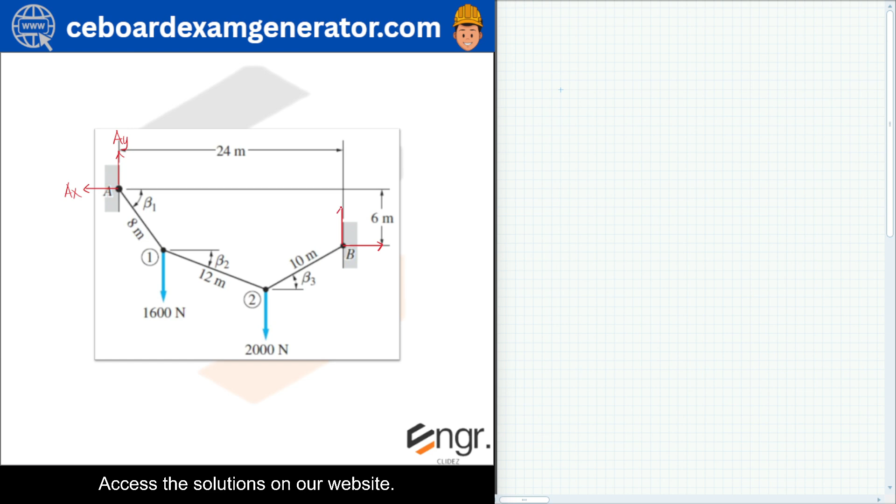Then dito sa point B, meron din tayong reaction acting away din sa joint. So this would be BY and this is BX. Notice na by summing up forces horizontal, considering the whole system, then AX must be equal to BX, since sila lang yung horizontal forces at kailangan silang mag-balance. So if AX is equal to BX, ang horizontal component ng cable na ito pala ay equal din sa horizontal component ng kabilang cable.

At looking at joint 2, nag-intersect yung dalawang cables dyan. So whatever the horizontal component of this cable is, it must also equal the horizontal component of this other cable, since magbabalance sila and the net horizontal force would be equal to 0. Ibig sabihin pala, sa lahat ng cables, the horizontal force is equal. So we define the horizontal force as sabihin natin H.

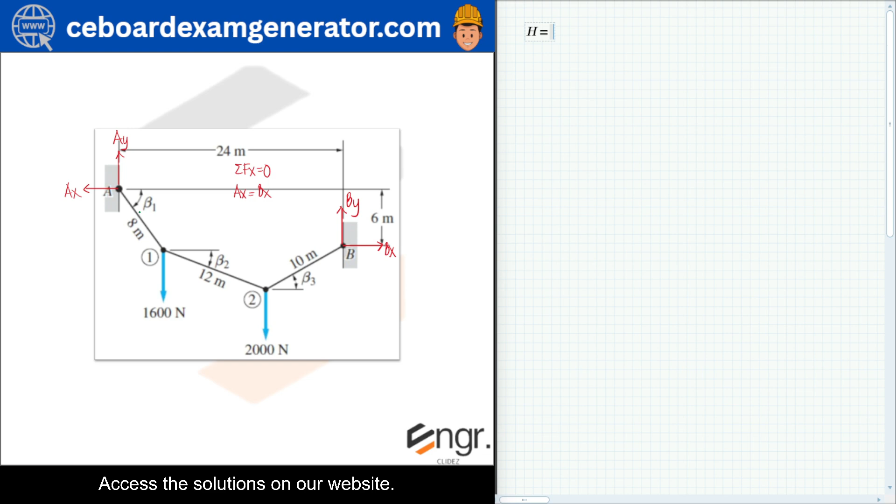So if the horizontal force is equal to H, sabihin na lang natin ito ay T1, ito naman yung T2, at ito ay T3. So H pala is equal to T1 multiplied by, for the horizontal component, cosine beta 1, equal din yan sa T2 cosine beta 2, horizontal component of T2, and also equal yan to T3 multiplied by cosine beta 3.

So therefore pala, if we express T1 in terms of H, we divide na lang natin yung H by cosine beta 1, we would have this expression: T1 is equal to H divided by cosine beta 1. And this would also be true sa T2 and T3, but we divide by cosine beta 2 and cosine beta 3 respectively. So T2 is equal to H over cosine beta 2, galing dyan. And T3 naman is equal to H over cosine beta 3.

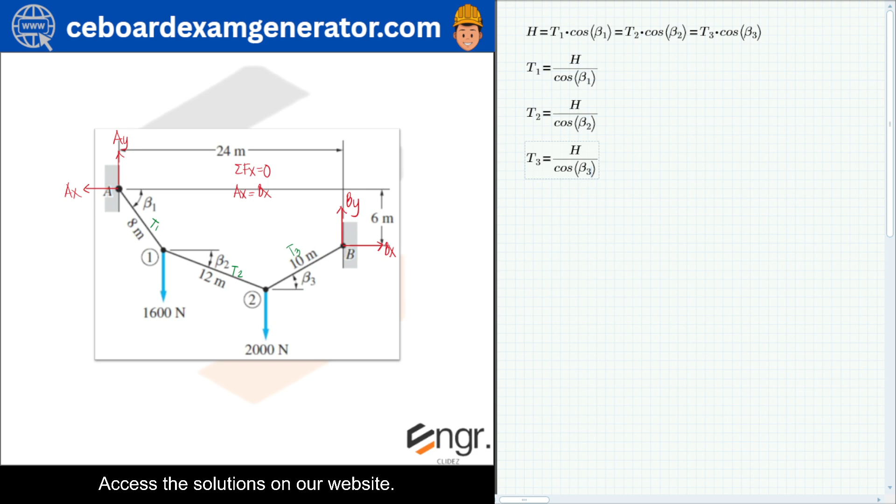Now, looking at this joint, at joint 1, we can sum up forces vertical. The vertical component of this force would be acting upward. Ayan, yung cable force na yan, pag ganyan yung components niya. So this would be T1Y and this is T1X. And for this cable naman, in tension, downward and to the right yan. So this would be T2Y and this is T2X.

So yung T1X saka T2X, ito yan sila: T1 cosine beta 1 and T2 cosine beta 2. Yung T1Y naman would simply be T1 multiplied by sine of beta 1, and this is acting upward. Yung T2Y downward, so we have minus T2 multiplied by sine of beta 2. At 1,600 is acting downward, so minus 1,600. Equate natin to 0. Rearranging, we have T1 sine beta 1 minus T2 sine beta 2 is equal to positive 1,600.

But we know that T1 is equal to this value, so we substitute H over cosine beta 1. Copy natin yan and i-paste natin to T1. And T2 is equal to this value. Using trigonometric identities, sine over cosine of the same angle is equal to tangent.

So this would be H multiplied by tangent of beta 1, minus H multiplied by tangent of beta 2, equals 1,600. We can factor out H, so we would have H multiplied by tangent of beta 1 minus tangent of beta 2 equals 1,600. So this would be our first equation.

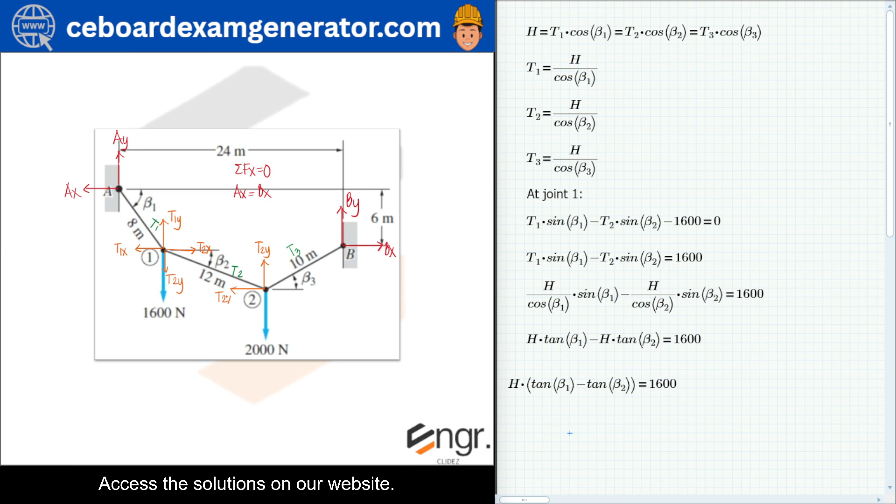For our second equation, we look at joint 2. Acting at this joint, this would be to the left and upward, so we have T2Y and T2X. At joint 2, we have T2 sine beta 2. Then for T3, also acting upward, T3y, and T3x will be acting to the right, plus T3 multiplied by sine of beta 3.

Let's equate the upward forces and the downward forces. T2y plus T3y is equal to 2,000 newtons. So this is our second equation.

But we can substitute T2 and T3 using the following expressions. T2 is equal to H over cosine beta 2, and T3 is H over cosine beta 3. This will just reduce into, same as before, sine over cosine will become tangent, but now for beta 2, and our operation is plus. So plus tangent of beta 3 then equals 2,000. So this is our first equation and this is our second equation.

Now for the third equation, we look at the geometry of the figure. The total horizontal length is equal to 24 meters. If we take the horizontal lengths of each cable, then it must equal 24. For this cable, this horizontal distance is equal to 8 meters, the hypotenuse of the triangle, multiplied by cosine of beta 1, so 8 cosine beta 1.

And this horizontal distance, from point 1 to point 2, this would be equal to 12 multiplied by cosine of beta 2. For this final horizontal distance, from point 2 to point B, measured horizontally, this would be 10 meters multiplied by cosine of beta 3. So our resulting equation from geometry would be 8 cosine beta 1 plus 12 cosine beta 2, plus 10 cosine beta 3. This should equal 24.

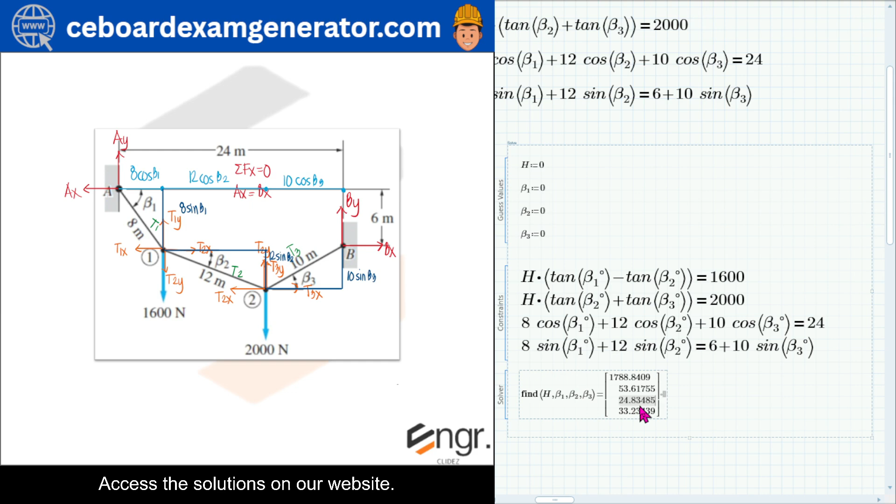Just press equals, and this is what comes out. So beta 1 is equal to 53.61755. Beta 2 is equal to 24.83, and beta 3 is equal to 33.23439. So that's our answer.

However, we can also solve this manually, but the catch is it won't fit on the calculator. So the solutions are actually on our website. Just go to the lecture notes, then PSAD, statics of rigid bodies, then there's analysis of cables. Go to problem 5, segmented cable reduced to one unknown. We have this figure.

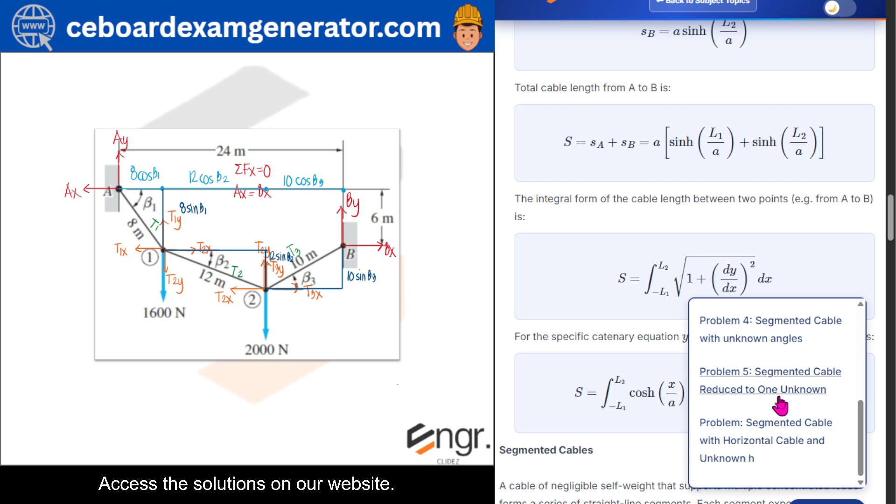If you click on show solution, we can draw a line from point A to point 2, this imaginary line, and we can define this horizontal distance as x. The x there will just be equal to 24, the total horizontal distance. If we subtract 10 cosine beta 3, then it would be this horizontal distance. So x is equal to 24 minus 10 cosine beta 3.

And this vertical distance is equal to 6 plus 10 sine beta 3. We can form this triangle. This is a right triangle. So the value of the hypotenuse would be square root of x squared plus y squared. And for this triangle, this is an oblique triangle, so we can apply the cosine law.

We define this angle as theta, the angle between this horizontal line and this imaginary line. If this is theta, then this is also equal to theta. And the angle between this imaginary line and the 8 meter line would be delta 1. And the angle between this cable and the imaginary line would be delta 2. So by our relationship, beta 1 is equal to theta plus delta 1. And beta 2 is equal to theta minus delta 2.

So we express everything in terms of beta 3. Theta would be equal to arctangent of opposite over adjacent. Opposite is, for theta, we consider the right triangle. The opposite side is 6 plus 10 sine beta 3, and the adjacent side is 24 minus 10 cosine beta 3. That's why we have this equation.

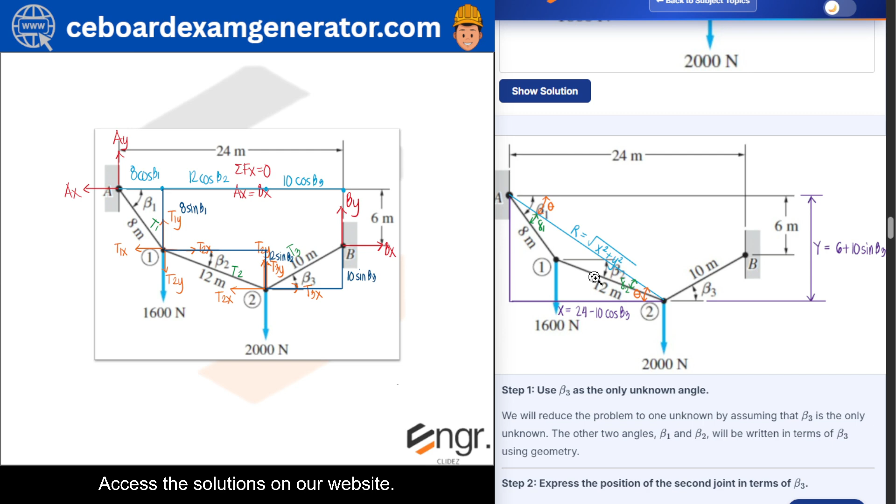Then considering the oblique triangles, we can use the cosine law. It's already reduced - essentially it comes from c squared equals a squared plus b squared minus 2ab cosine of the opposite angle. So the r there is this side, and the other legs would be 8 meters and 12 meters. So we can express delta 1 in terms of r, and r could also be expressed in terms of beta 3, so we can reduce our unknown to just beta 3.

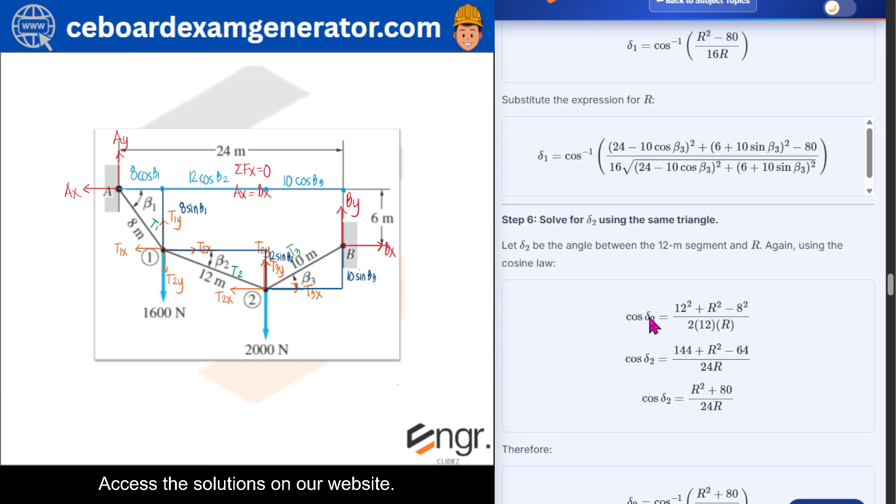And we also express delta 2 by the cosine law again in terms of r, and we substitute the equation of r in terms of beta 3 in our succeeding equation. So this is the resulting equation.

If we actually divide the first equation and the second equation, we can cancel h. So that's what was done there. h cancels, and cross-multiplying, we have tangent beta 1 minus tangent beta 2 is equal to 0.8 multiplied by tangent beta 2 plus tangent beta 3. Joining common terms and equating everything to 0, we have tangent of beta 1 minus 1.8 tangent of beta 2 minus 0.8 tangent of beta 3 is equal to 0.

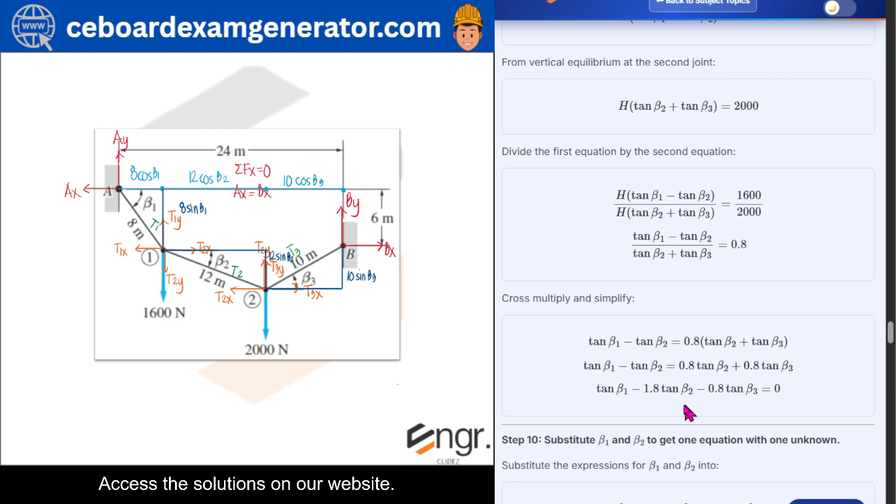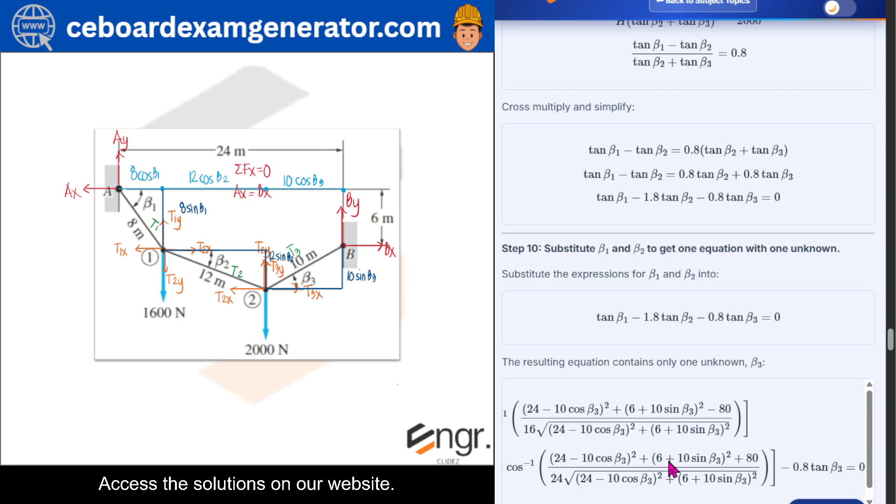However, beta 1 could be expressed as theta plus delta 1, and beta 2 would be theta minus delta 2. So plugging in everything, we can develop this very long equation. That won't fit in a calculator. But using MathCAD, we can test the following equation.

So this is the way to solve it if you want one unknown. But again, our calculator can't handle that. So this problem will actually require a computer program capable of solving nonlinear equations.

If this ever comes up on the board exam, hopefully, given all the angles, you can just use trial and error using these 4 equations. If you can form these 4 equations, trial and error becomes very doable, given that there are choices.